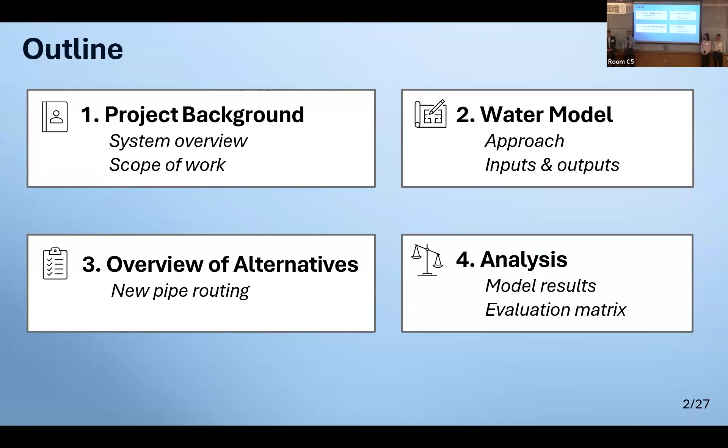To give you a brief outline of what we'll be talking about today: we'll start with our project background, go through our scope of work, talk about our water model, give you details on our input and output for that, give an overview of the alternatives we considered, and then go through our evaluation process and talk about the alternative we are recommending.

The well site consists of 2 wells and a well house, which chlorinates the water and sends it off to 2 water storage tanks. The Estates tank is a small 18,000 gallon tank that sits at the elevation of the neighborhood it serves, requiring booster pumps to maintain adequate water pressure, and Tank 1 is a 100,000 gallon tank that serves the Mountain Estates neighborhood.

Due to increase in water demand, the district plans on building a new 250,000 gallon tank called Tank 2. Along with that, they'll be decommissioning the Estates tank. It was our goal to determine the most optimal connection between Tank 2 and the Estates neighborhood.

In order to determine the most optimal distribution method, we have to model our system. Water modeling software such as WaterGEMS, InfoWater, and EPAnet-based tools all run on the EPANET hydraulic engine, have similar capabilities, and are expensive.

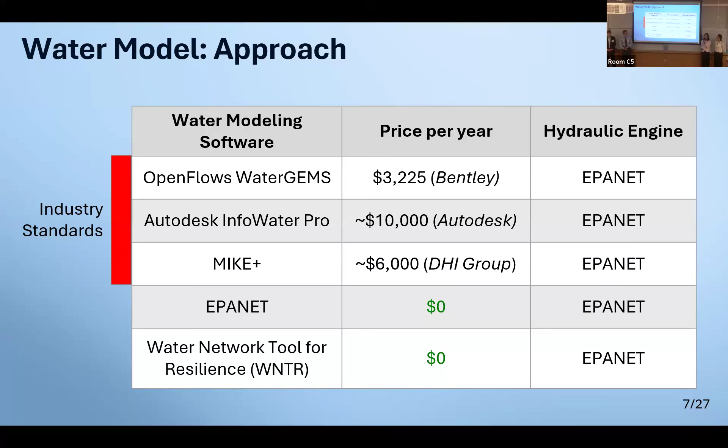So what is WNTR, the Water Network Tool for Resilience? It's a Python package created by the US EPA that allows custom scripts to access EPANET's hydraulic engine, or its ability to do hydraulic calculations.

What that meant for our project is that it allowed our custom Python script, developed with the help of our faculty advisor, to take a number of inputs and turn it into a water model. It created results in the form of Excel files, charts, and a time series animated map that Anya showed in the last slide. We'll go more into detail on all of these inputs and outputs in the coming slides.

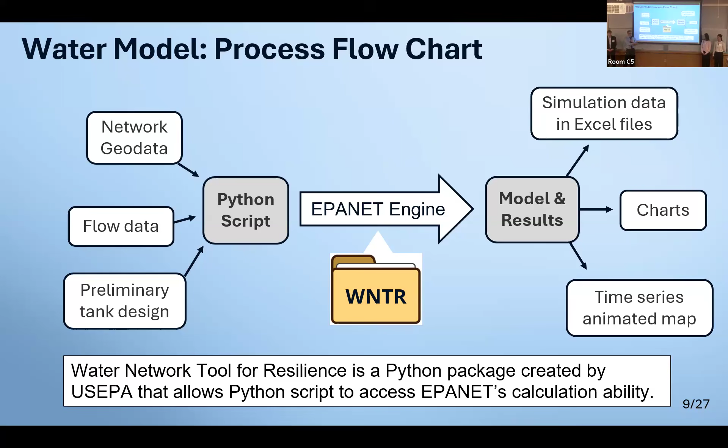The simulated water network required certain flow values, such as peak flow, peak average daily flow, and minimum daily flow. To define these values, we requested 10 years worth of flow meter data from the district. We then created a Python code to analyze the data and produce the values we needed. To ensure they were correct, we hand calculated a small sample size and ran the code to compare.

To go into some more detail on the input data we prepared for our model, we started with the GIS data provided to us by the Water District, and we converted it into a form usable by our script.

Next, a pump curve was approximated based on the total dynamic head required to lift water from its depth in the aquifer all the way to the top of that new tank, at reasonable flow values. And then all of that data was packaged into individual Excel files for each of the individual trials that we ran.

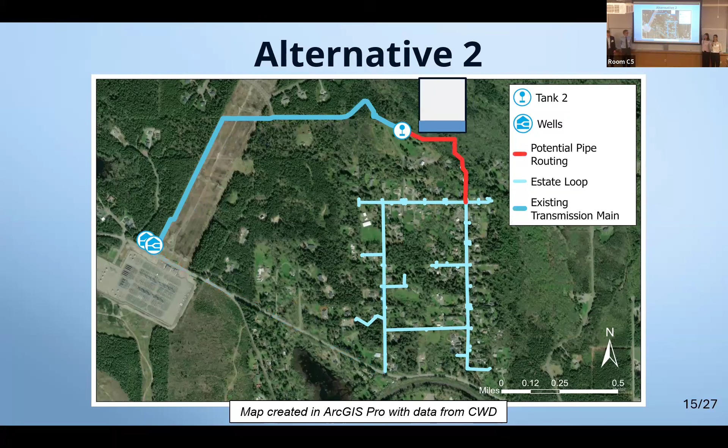Alternative 2 abandons that southern pipe, so all the water from the well house will be supplied to Tank 2. Then, to serve the community, we are proposing a newly constructed pipeline here, highlighted in red.

And that'll be connected at the northeast end of the community.

Alternative 3 is a combination of the previous two alternatives. In the same way as alternative 1, it'll split flow at the well house, one to fill Tank 2 and one to the SUGARLOAF Estates community. Then once at capacity, it can utilize bidirectional flow within the existing water main, as well as that newly constructed pipeline, which proposes two connections within the water network, creating a loop system for the district.

For alternatives 2 and 3, we are looking into a newly constructed pipeline. We aligned our pipeline in accordance to the existing easement that the water district provided to us, which goes through 4 different parcels of land and totals about 1,400 feet of pipe. With this, we analyzed 4 different pipe diameters: 6-inch, 8-inch, 12-inch, and 16-inch.

Here's our fully graded decision matrix. We have 6 criteria: hydraulic performance, cost, maintenance, constructability, permitting, and future considerations. We met with our sponsors and discussed their preferences, and we came up with the grades that you see here.

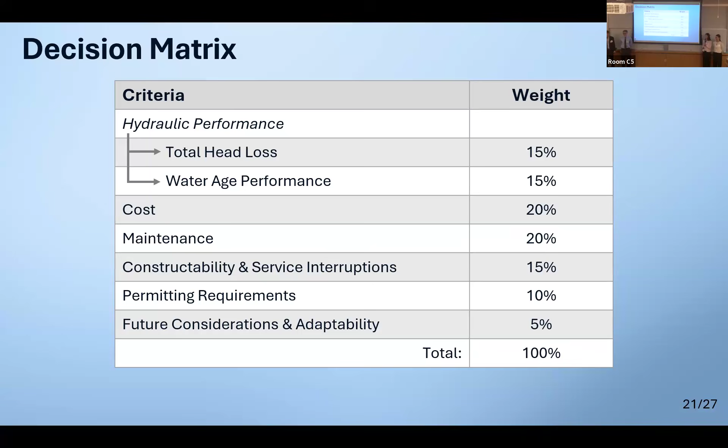For hydraulic performance, we assessed 3 factors: pressure within 30 to 80 psi, velocity less than 8 feet per second, and water age with a typical value of no more than 3 days. This is to avoid chlorine decay and stagnation. Water age is how long water has been sitting in the pipe since it left its source.

Based on the results of our trials for all of our alternatives across these 3 testing conditions, our first finding was that for high pressure scenarios, all of our alternatives performed similarly, so those were left out of our final analysis. Our next finding was that maximum water velocity was well below the mandated 8 feet per second for all of our alternatives, so that was also left out of our final analysis.

Next, we concluded that for low pressure scenarios, total system head loss was an effective representative measurement, because head loss is the energy that water loses as it travels through pipes and around bends within the system. Water stores energy in the form of pressure, so the higher the head loss the system has, the lower pressure we'll see within the system and at connections when you turn your faucet on in your home.

So in the end, we ended up with 2 criteria for our final analysis of hydraulic performance: total system head loss, and a metric related to water age tied to flexibility and operation, so the system's operators can ensure adequate turnover in the tank and maintain a reasonable average water age.

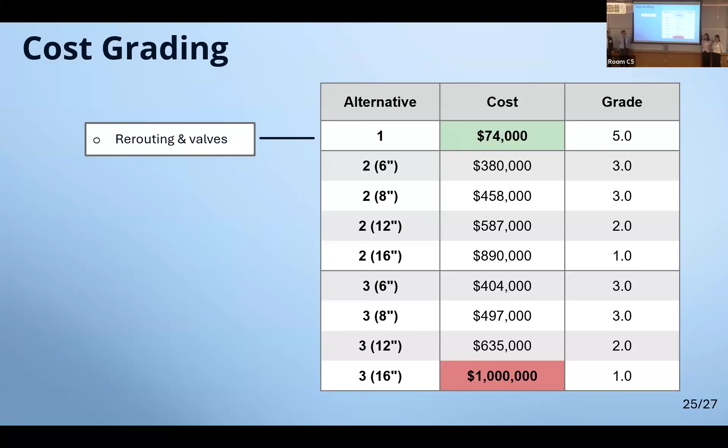Alternative 2 gets a lot more expensive because it involves laying down a new pipeline, which requires vegetation clearing, connecting to the existing water main, abandoning pipe, and more. Alternative 3 gets slightly more expensive because it's a combination of the previous 2 alternatives, involving rerouting, installing valves for bidirectional flow, as well as constructing the newly proposed pipeline. We found that our least cost-effective solution is alternative 3 with a pipe diameter of 16 inches, approximated at about $1 million, so it got rated the low score of a 1.

For alternative 1, we scored it a 1 because it is a branch system. Alternative 2 is also a branch system, however, it has new piping, so it's graded a 3. Alternative 3 is going to be a loop system, meaning part of it can be taken offline for maintenance while the rest remains operational. Therefore, we grade it a 5.

For constructability, alternative 1 was graded a 5 because there's very low construction. Alternatives 2 and 3 were graded lower based on their pipe diameter. For permitting, since alternative 1 has limited construction, it requires limited permitting, so it was graded a 5. Alternatives 2 and 3 both required a new pipeline to be installed, which requires numerous permits such as clearing, grading, and right-of-way, therefore it is scored a 1.

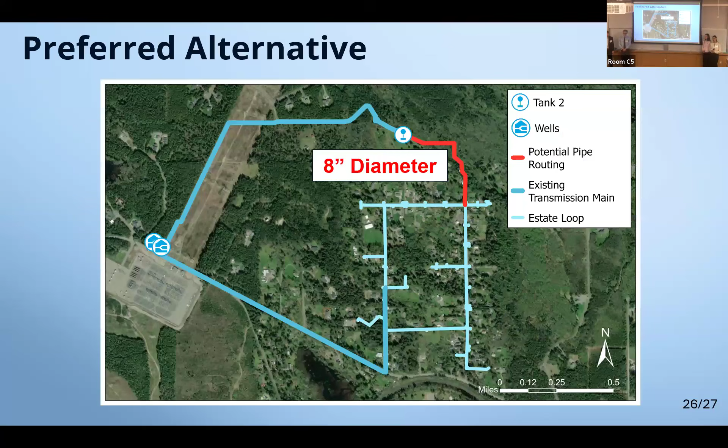Brilliant job on the analysis presentation. One of your slides had the different parameters that you used for scoring. I was wondering if each of those parameters were equally weighted, or should one parameter be weighted more than the other? To make sure I'm understanding your question correctly, it's about how we weighted each criteria and why we didn't make them all equal to each other.

So really the main aspect of it is with this modeling, we want to make sure that the customers always have adequate pressure and that it works well. Also, the cost of things is a big driver in the decision-making process. Constructability, permitting, and future considerations are big parts of the evaluation. However, after discussing with our sponsor, making sure they have the best hydraulic performance is definitely a priority.

Congratulations again on your modeling and your presentation, very clear, great presentation. I'm curious about your fire flows. Did you consider fire flow at all, and how would the fire flow demand affect your pipe diameters and your analysis?

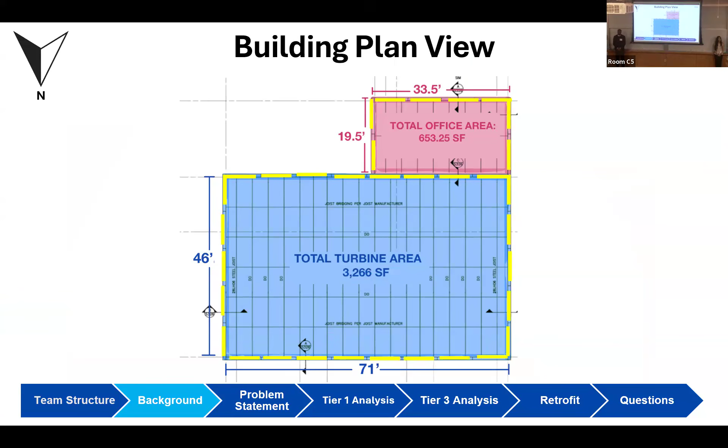As you can see, in blue is our main building, which has 1 story. In red is our office building, which has 2 stories. The entire building is made of precast concrete panels, shown in yellow. These are our shear walls, the main structural component resistant to lateral forces such as seismic forces. In the event of an earthquake, these walls take the north-south component, and these take the east-west component.

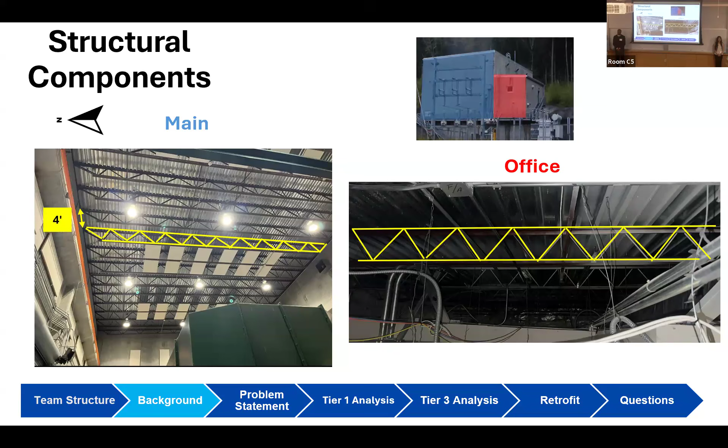Onto more structural components: in the picture on the left, we have a truss in yellow. This is an AOH 28 steel joist, running north to south, spaced 4 feet apart. The picture on the right is a close-up of the truss. On top you can see the steel deck, which is 1.5 inch corrugated steel deck. You can also see the concrete walls from the inside.

Now Daniel's going to talk about the problem statement. The powerhouse is a key facility of Seattle's water drinking system. Although it doesn't generate power for the city of Seattle itself, its primary importance is supporting continuous water delivery and treatment, which makes maintaining its functionality critical.

However, the powerhouse was built before current seismic code provisions, meaning its ability to resist earthquakes is uncertain. Because the powerhouse is located in a region influenced by earthquakes, a major seismic event could cause significant structural damage and disrupt operations. Since it's a key facility, Seattle City Light needs to ensure it remains safe and operational even after an earthquake. For that reason, our team has performed an assessment following ASCE 41-23 and the Seattle existing building code for retrofit.

Now Eric is going to talk about the risk category of the building. Before we can start our assessment, we first need to determine the performance objective of the building during an earthquake. To do this, we first need to determine the risk category of the building.

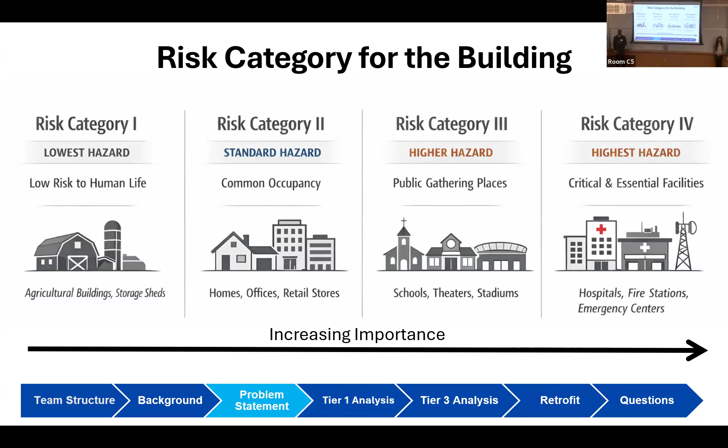Risk category, as defined by ASCE 7-22, goes on a scale of 1 to 4, where 1 is low risk to human life and 4 is an essential building like a hospital. As mentioned earlier by Daniel, because this is a key facility, we can classify this as a risk category 4 building. From this, we can use ASCE 41-23 to determine the performance objectives based on two hazard levels using new building design standards.

We'll be using new building design standards instead of existing building design standards, as requested by Seattle City Light. So for a BSE-1N, or a rare seismic event, it will require immediate occupancy performance.

Immediate occupancy performance means that during an earthquake, the building sustains minimal damage, and after an earthquake, people can immediately occupy the building, making it operational again.

Meanwhile, for a BSE-2N or a very rare seismic event, it will require a life safety performance. Life safety performance means that during an earthquake, the building sustains some damage, but doesn't fully collapse, and after an earthquake, people can safely leave the building.

So how we're going to use this is we first determine the period of the building using ASCE 7-22, which came out to be around 0.1 seconds. From this, we can read the spectral acceleration, which came out to be around 1.1 g. And from this spectral acceleration, we can then multiply it by the weight of the building to give us the shear demand needed for our assessment.

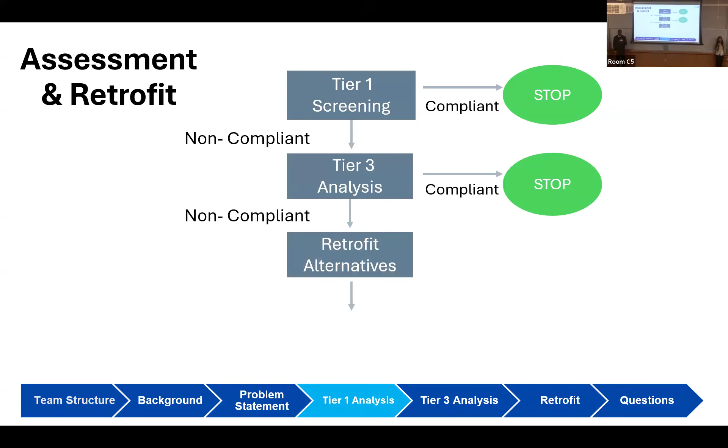If an item is found to be compliant, then we will stop and no further analysis will be done on that item. But if it is found to be non-compliant, we will take those items down to a Tier 3 analysis where we'll look further into those non-compliant items. The same process will then happen here. If it is found to be compliant, then we will stop and no further analysis will be done. But if it is found to be non-compliant, those will be the items taken down to retrofit alternatives, where finally the team will be able to recommend the best suited alternative for Seattle City site.

Shown is an example of what these Tier 1 checklists look like. Highlighted in yellow, you'll see that it gives us the checklist type. This one shows the immediate occupancy, but like I mentioned earlier, we also checked the life safety. Also highlighted in yellow, you'll see that it gives us the building type. Our building is made out of precast concrete, so that's why we are using the PC2.

Shown are the 3 evaluation statements that our team found to be non-compliant from our Tier 1 screening. These items had to do with the transfer to shear walls, which describes how our diaphragms, like our roofs and floors, are able to transfer those seismic forces onto our shear walls. Another item had to do with any openings immediately adjacent to our shear walls. And a third item had to do with our wall thickness.

Because these were the only 3 items that we found to be non-compliant from our Tier 1 screening, these are the 3 items that will get taken down to a Tier 3 analysis, which Daniel will further explain.

So continuing with Tier 3 analysis, we have the opening adjacent to shear walls. Here we are looking at the 3D representation of the office portion of the building. The lower level goes from 0 to 11 feet, and the upper level goes from 11 feet to 23 feet. In the middle, we have an intermediate office floor slab, which is our diaphragm, shown in blue.

In seismic design, the diaphragm is a horizontal structural element, such as a roof or floor slab, that collects earthquake forces and transfers them into vertical lateral force resisting systems such as shear walls. In this case, the diaphragm has an opening, meaning it cannot transfer seismic forces uniformly into the shear walls.

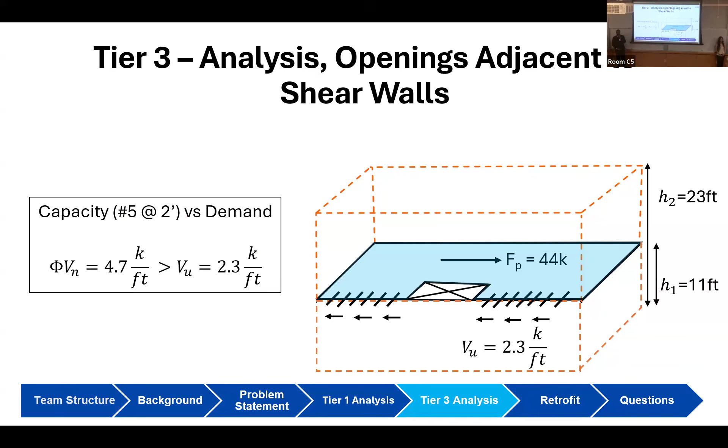Given these forces, we calculated our maximum demand, but this does not account for the slenderness of the wall. Using an equation that accounts for slenderness, we obtained a moment demand of 12 kip-ft on a per foot basis. To analyze capacity, we took a 12-inch cross section of our wall panel and determined a capacity of 13.6 kip-ft, making capacity greater than demand and this item compliant in our tier 3 analysis. Now Lisa will explain the last item.

Finally, to assess the transfer of seismic forces from the diaphragm to the wall, we compare demand versus capacity. For demand, we look at the roof plan, where we have two types: type 1 on the edges, and type 2 in the middle. We load this with our seismic forces and observe the shear that occurs in each type. From this we came up with a shear diagram, from which we calculated a shear demand for type 1 of 1.76 kips per foot, and for type 2 of 0.83 kips per foot.

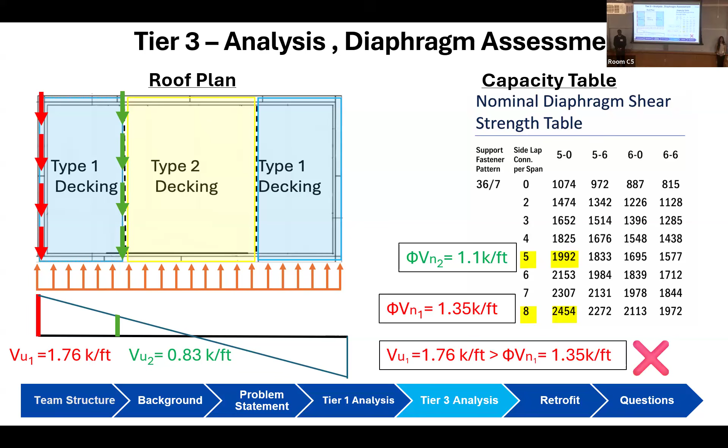This is the only item that was non-compliant from the tier 3 analysis, and therefore is the only item that we're going to retrofit.

As Lisa mentioned, there's only one item that is not compliant from our tier 3 analysis: the transfer of load from the diaphragm into the concrete wall. So we only need to do one retrofit for that connection.

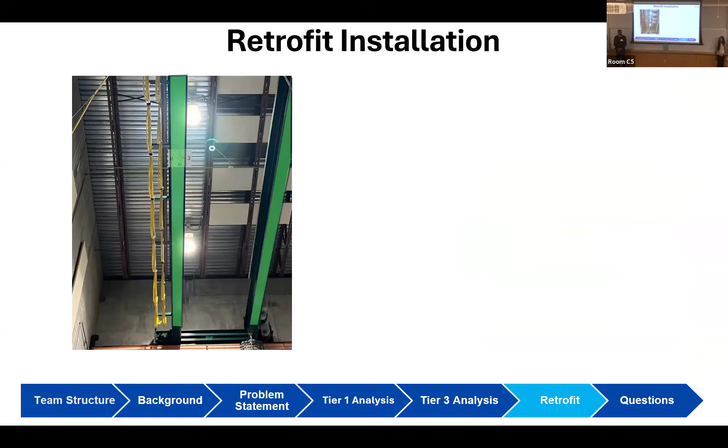Aside from our retrofit, we'll also be designing a platform. This platform will be used by steel workers standing on it to install the retrofit. We'll utilize the crane by using the crane leg to place beams, and on top of those beams we'll have our deck.

So just to give a quick summary of what we did, we first started off with a tier 1 screening. From that tier 1 screening, we found 3 deficient items: the transfer to shear walls, the openings at shear walls, and the wall thickness.

Because of these 3 items, we then took that to a tier 3 analysis. In that tier 3 analysis, we found that openings at shear walls and the wall thickness were compliant, meanwhile the transfer for shear walls was non-compliant.

Because of this, we then took that item into the retrofit phase, and from that retrofit we created a design which consisted of installing the L angle to the metal deck and the concrete wall. In addition, we also designed a platform where the steelworkers can install the retrofit.

In addition to all of that, we also created a cost estimate, which came out to be around $38,000, which included all the materials, labor, and anything else. Thank you for listening. Is there any questions?

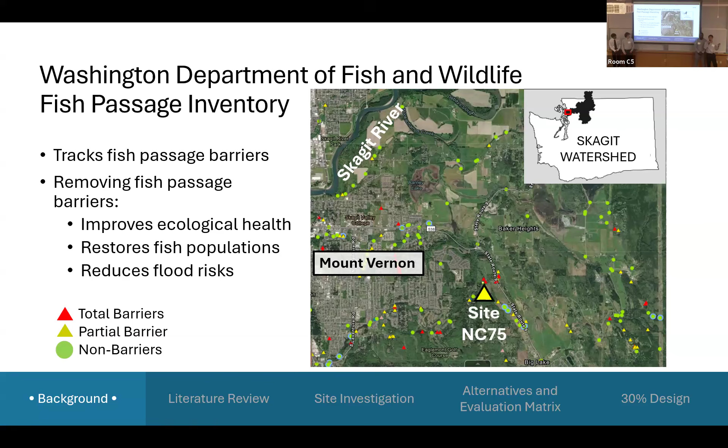So to start things off, we want to first talk about the Washington Department of Fish and Wildlife, or WDFW, Fish Passage Inventory. The WDFW tracks fish passage barriers across the state and identifies them as either total, partial, or non-barriers. This inventory aims to remove these barriers in order to improve ecological health, restore fish populations, and reduce flood risk across the region. Our site is located within the Skagit watershed and has been identified as site NC75, a partial barrier due to an existing culvert.

Looking more into our site, it was previously privately owned by a local couple, but it has recently been donated to Skagit County. Skagit County plans to incorporate this site into the reopening of Hiawatha Big Rock Park, which is a hiking trail that's been closed to the public since 2010.

As mentioned before, our site has a current culvert with a diameter of 4.5 feet and a span of 35 feet in length. This culvert has a slope of 2.2% and a smooth metal interior, which leads to fast and shallow water flow.

As a result, a 2001 survey showed that this site only has a 33% fish passability. One last thing to note is that the culvert is currently showing some structural damage, which means water may actually be flowing outside of it.

This is important because our site has a drainage area of 1.25 square miles, and removing this existing culvert would restore 1.36 linear miles of upstream habitat for native fish, such as cutthroat trout, chinook, chum, steelhead, coho, and pink salmon.

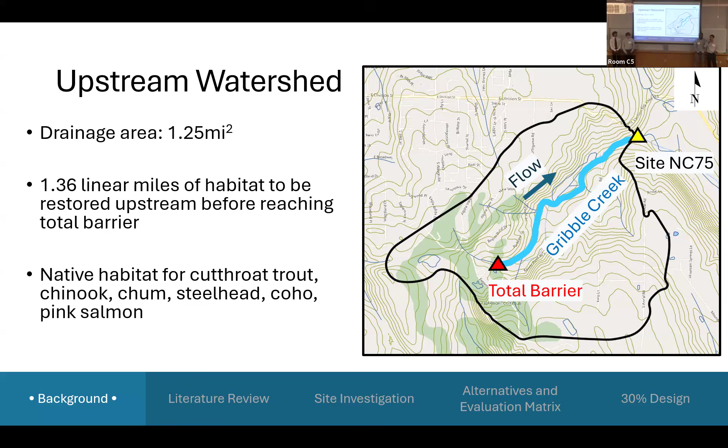Shown here is a map of the surrounding area. As you can see, water flows downstream from the total barrier to our site, which eventually continues to flow under State Route 9 before joining with Nookachamps Creek. From there, Nookachamps Creek flows north and eventually merges with Skagit River.

Our objective is to remove this existing culvert in order to improve fish passability, then restore the stream to its natural conditions. However, Skagit County would also like to preserve the crossing the culvert is currently providing, and has therefore asked us to evaluate some other crossing alternatives.

As part of our literature review, we looked at several different manuals. This includes the WDFW Water Crossing Design Guidelines, which helps with stream restoration, hydraulic design, and determining a crossing structure. We also looked at the USGS magnitude, frequency, and trends of floods at gauged and ungauged sites in Washington based on data through water year 2014, which helped us estimate the volume of floods passing through our site.

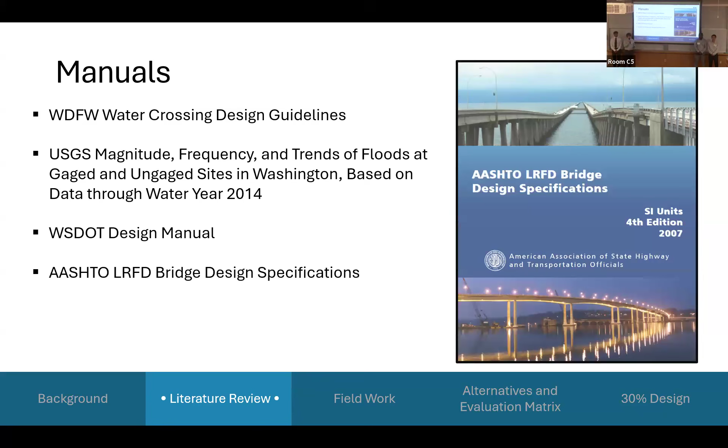We looked at the WSDOT Design Manual to help determine bridge geometry, and then two AASHTO documents, the LRFD Bridge Design Specifications and the Guide Specifications for the Design of Pedestrian Bridges, which each helped us with different structural requirements for our crossing structure. Within the WDFW manual, we looked at 4 preliminary options for culvert replacement.

The first one was a complete removal of the structure, which is the preferred method for stream restoration, but would remove crossing for pedestrians and wildlife, which makes it unsuitable for our site.

We then looked at 2 different culverts: a no-slope culvert, which is flat, and a stream simulation culvert, which is sloped but mimics the natural channel bed inside of the culvert. However, both of these culverts block off the floodplain, the area where water flows under extreme weather events, and they do not tolerate any lateral movement of the channel.

Based off of preliminary site research, we determined that both of these characteristics would be very important for our site, and thus we decided to proceed with our last option, a bridge.

Bridges can be used on any size channel, and they're extremely flexible in design. Additionally, they do not obstruct the floodplain sitting above it, instead bringing greater riparian benefits to our site. Bridges are generally more expensive than the other options, but we determined that preserving the floodplain and allowing for lateral channel movement would be of great benefit for our site.

Within the WDFW manual, we then looked at several requirements for bridges. This includes that we need at least 3 feet of clearance between the 100-year flood surface, the most extreme flood event we'll be analyzing for our design, and the bottom of the bridge.

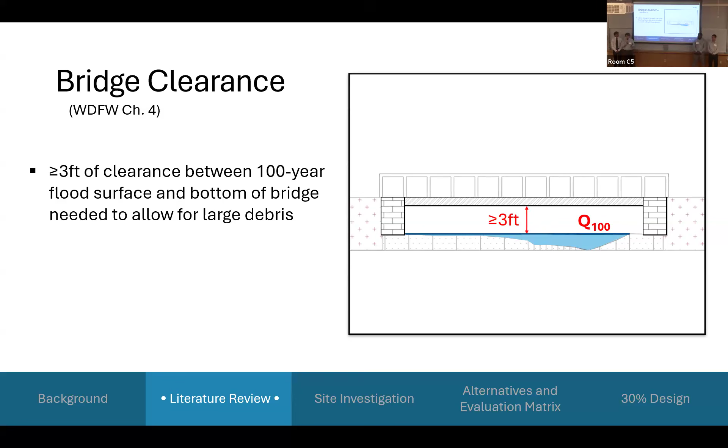This is necessary so that any large debris passing through the site does not get snagged on the bridge and cause damage. Additionally, our bridge should ideally span across the entire floodplain. However, this is not always economically feasible in case the floodplain is extremely large.

Under this circumstance, we may encroach into the floodplain, but we'll have to do several other checks to ensure that the bridge is still suitable for our site.

In order to make sure that we stayed in compliance with our bridge span and our bridge clearance, it was important for us to determine what our annual exceedance probability was for our 2-year and our 100-year flood. To do this, we looked at the USGS manual, which gave us the equation based on our flood region being flood region 3.

Shown here in the equation, you can see the lowercase variables, which represent coefficients based on the flood region. You can also see the capital A, which is based on our area that we took from the watershed delineation. And the capital P is the annual mean precipitation, which we took from StreamStats.

With all of those, we were able to calculate what our 2-year flood was, which was 28 cubic feet per second, and our 100-year flood was 93.2 cubic feet per second.

Next, we wanted to get an idea of our bridge geometry, so we took a look at the WSDOT design manual. There, we found that the minimum width was 8 feet, and we also looked at the railing height of 54 inches, which is used to protect bicycle groups. One thing to note is that this is not a WSDOT project, so we only use this as a recommendation.

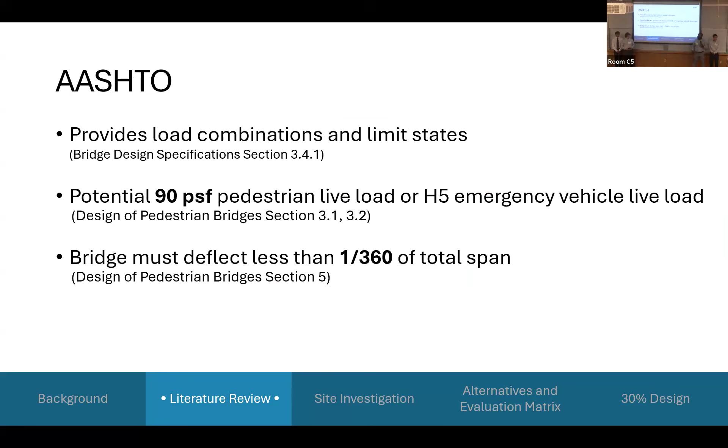With this channel geometry, we wanted to determine the shape of our 100-year flood to help determine the clearance of our bridge and the necessary span. To do this, we looked at several empirical equations, including the bankful discharge equation, which measures the volume of water passing through the bankful stage of our channel.

Within this equation, we found that the width of our bankful stage was 12.6 feet and the height was 1.4 feet. We then determined our slope using the longitudinal profile we made on site, and determined the median pebble size by recording the diameters of various rocks within our channel and graphing the result. Using all of these values, we determined that for this cross-section, our bankful discharge was 28.4 cubic feet per second.

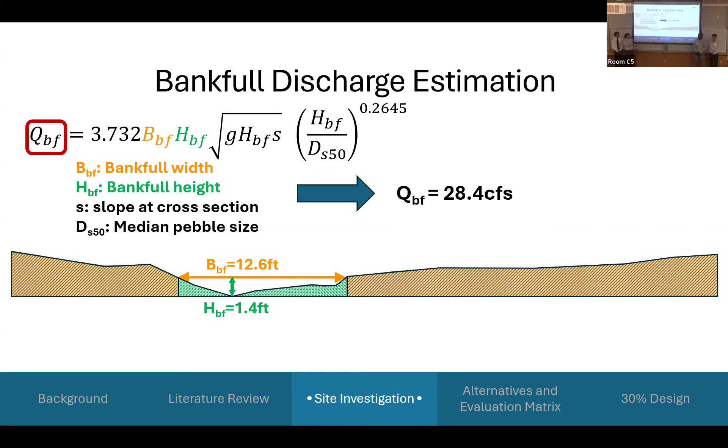Using all of these values, we were able to determine N, the roughness coefficient. In our case, we found that the bankful roughness was 0.021. The roughness within the floodplain is much different, as water rarely flows there, so we used tabulated values for heavy brush areas of 0.075.

Using these roughness values, we then applied that back to Manning's equation, but this time with our 100-year flood of 93.2 cubic feet per second. Within Manning's equation, we still know our roughness and our slope, and our area and hydraulic radius can be expressed as a function of the water height.

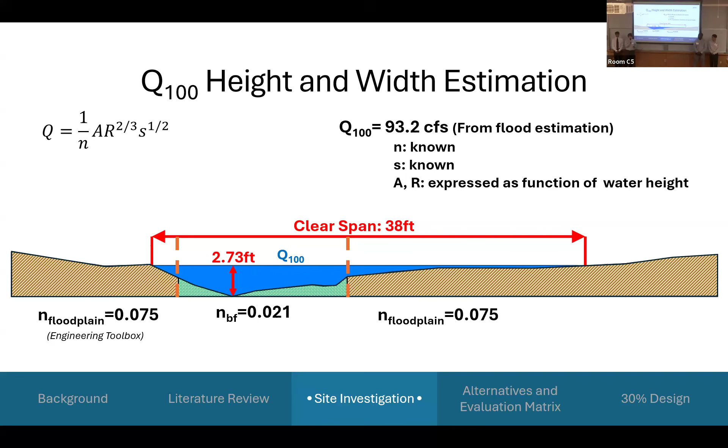This is to ensure that we have a smooth transition from this nearby cross-section to the bridge's location, and to ensure that we are not encroaching into the floodplain.

Once we were able to determine our bridge span and channel geometry, it was important that we looked at some alternatives. Our first alternative was a steel girder bridge. With this, we found that it had easy construction as well as quick construction and a long life cycle. However, it may require a crane being brought on site, and it also has vulnerability to corrosion due to being steel.

Our next alternative was a steel truss bridge. With this, it had easier material components to handle when being brought onto the site, as well as a great strength to weight ratio. However, with the steel truss, the problem is difficult construction and labor-intensive upkeep of maintenance over time.

Next, our last alternative was a timber girder bridge. With this one specifically, it also had a great strength to weight ratio, and it also had predictable fire safety. However, with it being timber, it was susceptible to biological attacks from insects as well as decay from water.

With those alternatives decided, it was important for us to get an evaluation matrix to determine our preferred alternative. We got some criteria and weighted them and got approval from our sponsors. One of our first major criteria was environmental impact, which looked at little to no site disturbance and little to no toxic chemicals. With this, the timber girder bridge won out over both alternatives.

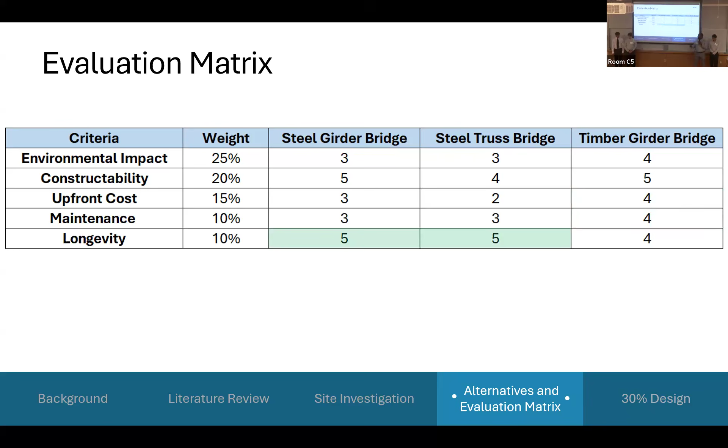We also looked at maintenance, longevity, hydraulic capacity, public safety, as well as aesthetics. With all of these ranks, we were able to determine that our preferred alternative was the timber girder bridge. With this, it won out with a score of 88 out of 100 over the other alternatives.

Now moving into our 30% design, I'd like to dive more into detail about those site constraints that Matt talked about previously. Our main site constraints are these trees that sit adjacent to the culvert.

Specifically this tree, circled in red, which is currently being undercut by the stream, causing erosion of the material around the roots. Our sponsors anticipate that this tree will collapse or be cut down during the construction process, so they will not look to preserve it.

However, they would like to preserve the trees just behind it, to the left of this red line. In order to do so, we will be placing one of our abutments in line with these trees to prevent undercutting.

Here is a plan view of our site with our proposed bridge location in the orange hatch. Our north side abutment will be in line with the edge of the floodplain.

Here are those trees that I just talked about, with the tree that's currently being undercut highlighted in the red dot. We will be placing our south side abutment in line with those trees behind it to prevent undercutting and erosion.

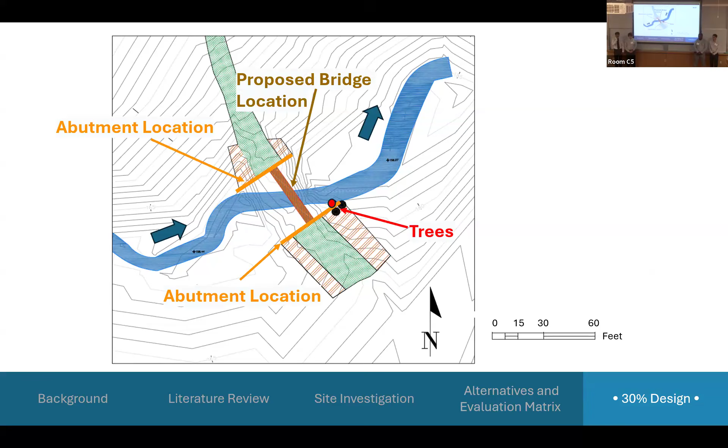Moving on to our bridge design, I'd like to highlight some of our bridge geometry. We consulted with our sponsors over the size of the vehicles they would need to pass over the bridge and arrived at a width of 5 feet.

We will be using a railing height of 4.5 feet to ensure cyclists don't fall over. Using the NDS wood design manual as well as the AASHTO load cases, we sized our wooden girders to be 12.25 inches wide and 18 inches deep, using glue laminated yellow cedar. We will also be using 3x12 wooden beams that span across the bridge as our decking.

And our bridge will be 40 feet in span. Here is the current condition of our site.

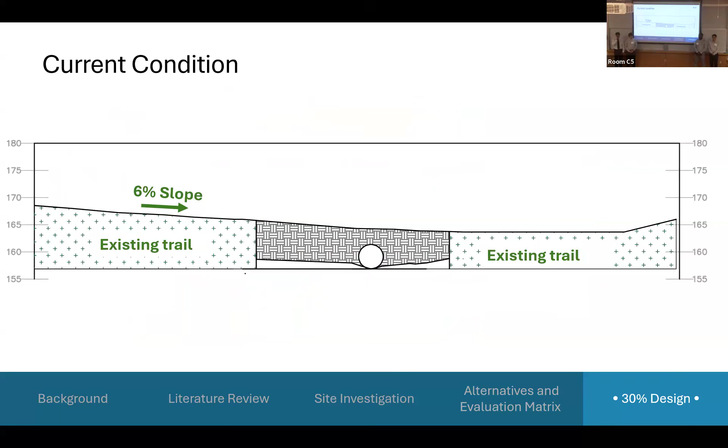Our trail currently has a 6% slope that goes down to the location of the culvert. We will need to excavate this region about 300 cubic yards of fill to remove the culvert and restore the stream to its natural condition. We intend for our bridge to be at a level grade, so we'll need to fill this region to ensure that the bridge and the trail are at the same grade.

Going further into our bridge design, like I said before, our bridge is 40 feet in span, a little bit longer than our Q100, to account for climate change as well as ensure that our south side abutment is in line with those trees. Here is our Q2, or the height of our average discharge, and then our Q100, which sits 5.9 feet below the bridge superstructure, well within the WDFW clearance requirement of 3 feet.

We do not have a geotech report on the site, so we will be working under the worst-case assumption that the scour line sits 3 feet below the ground surface, and our foundation must sit 2 feet below this line, for a total of 5 feet below the ground surface.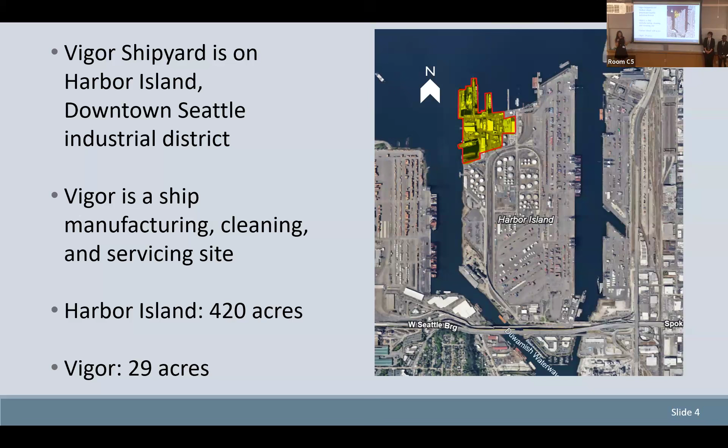It occupies 29 acres in the northwest corner, shown here. And Harbor Island is 420 acres.

So our problem statement: Washington State's piers currently drain untreated stormwater into surface water, such as the Puget Sound. Therefore, we have been tasked with designing a system to collect and treat stormwater from Vigor Shipyard's piers to prevent common stormwater constituents from entering Elliott Bay.

All right, so here's an aerial view of the site. Essentially what you're looking at right now is an area highlighted in blue, which represents the area in which stormwater is currently being treated. There is a drainage system that conveys all the water to the detention tanks right here, and there is a treatment system on site.

The areas highlighted in yellow, which represent piers, are the areas that are untreated. Why are they untreated? Because the piers were built before stormwater collection systems existed, so instead they drain directly into the Puget Sound.

We want to mention that we have 4 piers operating at Vigor currently, but for the scope of our project, we're only focusing on Pier 3 and Pier 4.

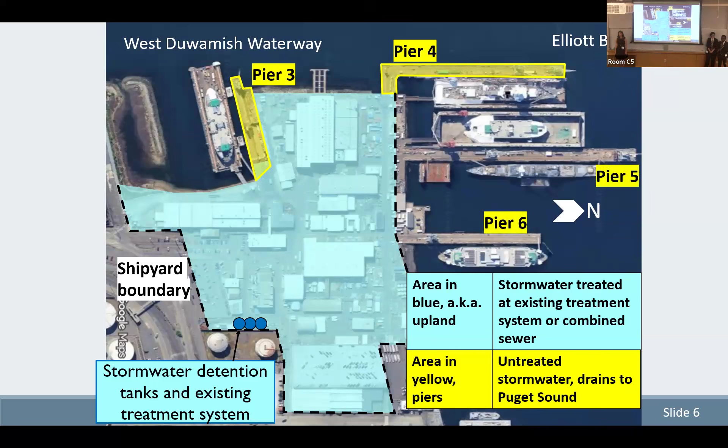So here's Pier 3. Pier 3 has 2 sections, an old section and a rebuilt section. The old section has 666 deck drains, and the rebuilt section, which is graded, has 5 deck drains.

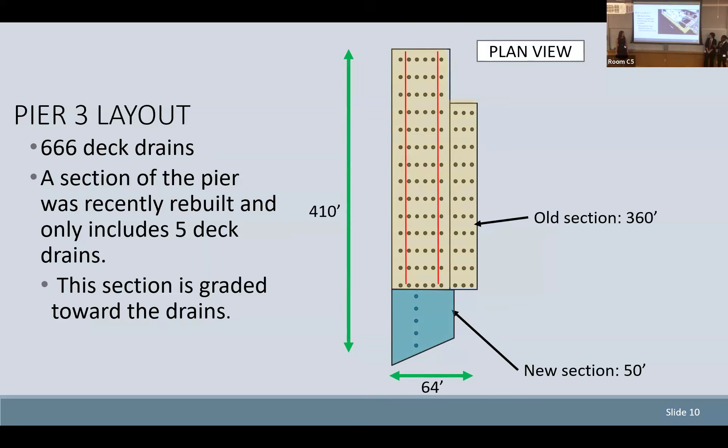So, jumping into our proposed alternatives, the goal of these proposed alternatives is to design a stormwater conveyance system for piers. I'm going to briefly describe option 1, option 2, and option 3. For all 3 options, the water will be collected through deck drains and then conveyed through pipings.

Briefly explaining option 1, the water is collected and sent to the nearest catch basin, and from the catch basin it can be conveyed directly to the existing treatment system.

Option 2: instead of conveying it to a catch basin, we are going to convey it to a wet well, and then the water will be pumped to an upgraded treatment system that has been chosen.

Option 3 is quite different from option 1 and 2. Instead, we're going to treat beneath the pier, where the treatment unit will be placed, and that's how the treatment operates.

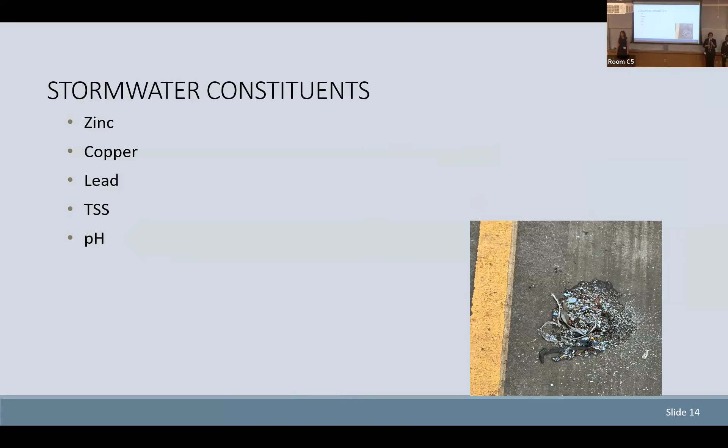To begin, we have main constituents being heavy metals. This includes zinc, copper, lead, as well as total suspended solids and the pH of the water. Vigor does a great job of managing the constituents on site with sweeping and best management practices, but this is largely impactful to the aquatic environment nearby, and the introduction of these contaminants can be very harmful to our precious coho salmon as well as the vegetation and water quality.

We will determine the amount of water that comes off of a pier that needs to be treated with the Western Washington hydrologic model, and then partnered with the amount of water that a treatment system can handle, we will determine how big or how many units we need.

Our first option is the chemically enhanced sand filtration system, which is the on-site treatment unit we've discussed. Our second option is a filter media bed, an equipped system about the size of a trailer, placed on shore. Our third option is an Aqua flow filter, a cartridge-based unit about the size of a catch basin. So in order to get the water there, we need closed deck drains.

We've modeled this with the Santa Barbara Urban Hydrograph and then compared this flow to the capacity of a deck drain, which was modeled with the Weir equation. Our main design constraints here are the ponding depth on the pier, how much water that was given to us by our sponsors. This includes a factor of safety of 2.

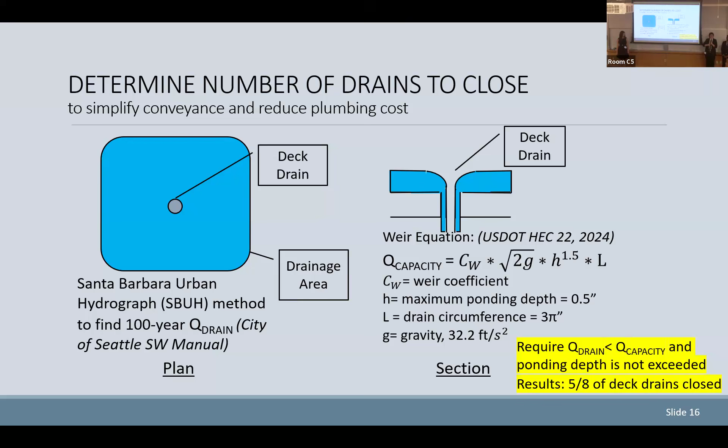By closing deck drains, we increase the area surrounding a deck drain, therefore increasing the flow that enters a deck drain. We've done this iteratively until we've concluded we close 5/8 of the deck drains and ensure that the capacity of the deck drain is not exceeded, as well as that the ponding depth on the surface of the pier is not exceeded. So there was that situation with the 5 deck drains on Pier 3.

So this section, the water will travel to the nearby catch basins. And for the old section of the pier is where we will be designing the pipe conveyance system. So we have a few main constraints: one is that pipes cannot descend below the high tide at 11.36 feet, or else they will be submerged by salt water. Another constraint is that pipes cannot descend below the invert elevation of the catch basin, otherwise water could backflow into these pipes.

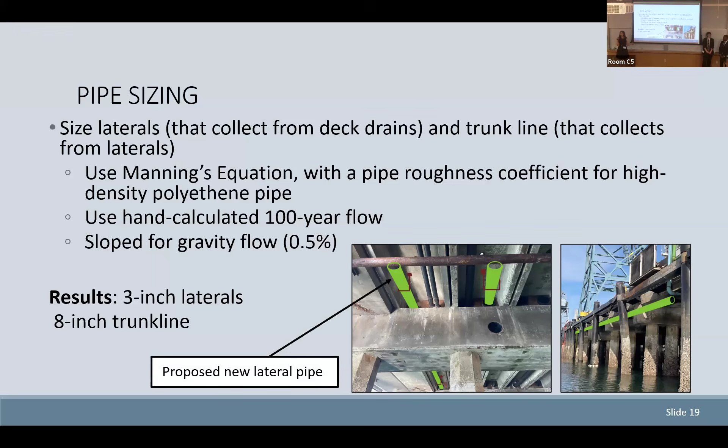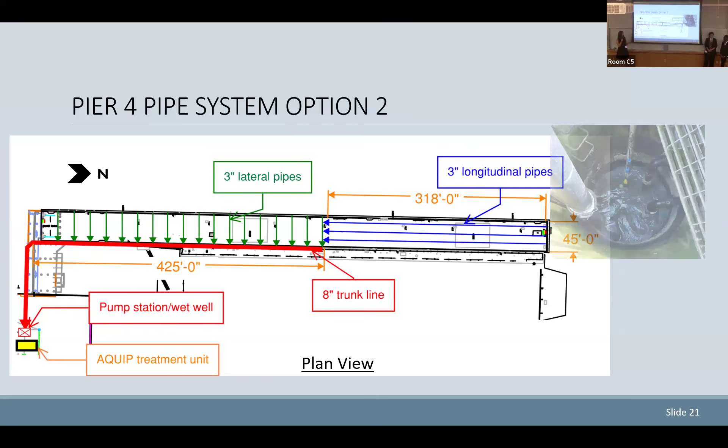The second option features a similar conveyance system to option 1, but instead of reaching a catch basin, the water reaches the shore and enters a wet well with a pump station, which pumps water to an at-grade treatment unit shown here in yellow, and gets filtered through a media bed and then discharged back into the Puget Sound.

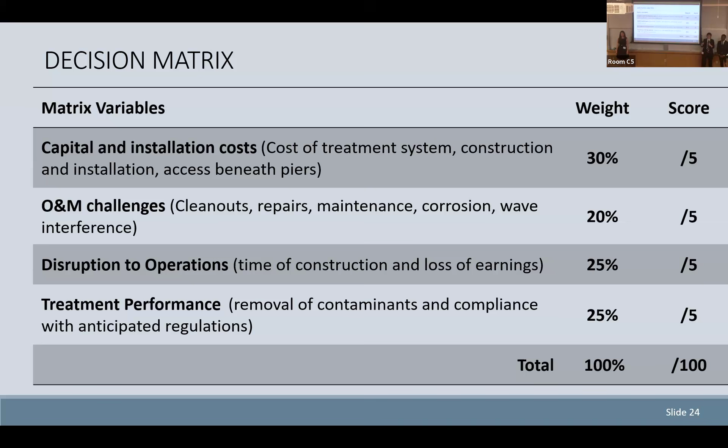In total, our least expensive option was option 1 for both Pier 3 and Pier 4, and option 2 was our most expensive. So we've compared all of our alternatives, including the costs with operation and maintenance challenges, as well as the disruption to operations, what would require Vigor to stop operating, and the treatment performance, compliance with anticipated regulations, and how clean the water will be at the end.

For our 30% deliverables, we are going to have CAD drawings and hydraulic analyses. For our CAD drawings, we have a plan view, which is like a view from above, showing the pipe layout network and the location of the catch basins.

For profile views, we're showing how the pipes are sloped and where the catch basin is located along with their elevations. And for section views, it's a cross-sectional view of the pipes.

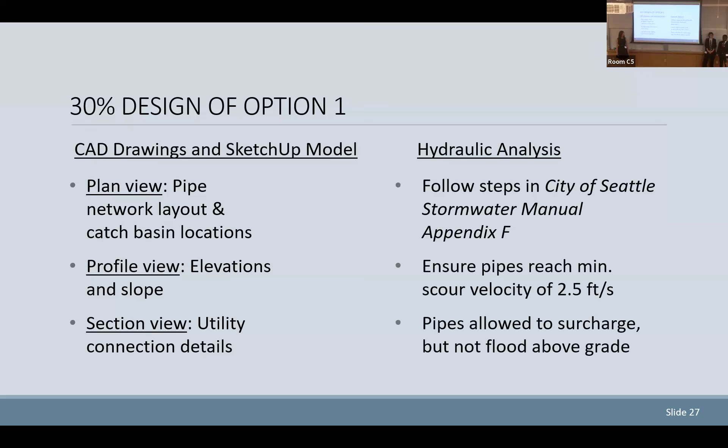For hydraulic verification, we're using Appendix F of the City of Seattle manual, just to ensure that scour velocity will be reached. We're also ensuring that the pipe will not flood above grade even when they can be surcharged.

Here we confirmed that there's no flooding above the grade, so our pipe sizing is successful and we can move forward with our 30% design.

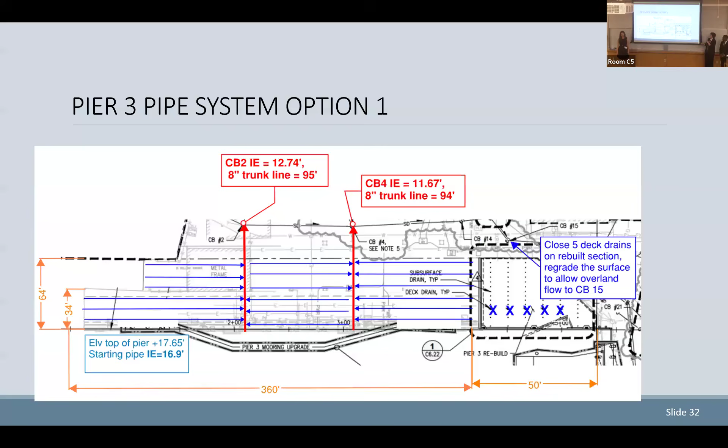Did you do any hydraulic analysis and verification for Pier 3? Thank you so much for the question. The question was, did we complete any hydraulic analysis for Pier 3? We definitely did. Here we have our options.

Let's see if I can get to my video. We did the same process as we did for... it does look like I've stopped sharing, unfortunately. Apologies for that. But we have a nice little video of modeling that pipe design network that we preferred. It's outlined on our poster, and we created that same design storm and made sure that the water doesn't flood above grade.

Here we go. Just down a bit.

There's Pier 3, and then we have a video right here.

I have a question. In option 2, which was above grade treatment, was it ever discussed with the sponsor of turning that into some sort of public display showing how the water gets treated? Thank you for the question. The question was, did we consider turning the at-grade treatment media unit into a public display for people to see how the water gets treated. We have not discussed this, primarily because Vigor is a private shipyard, so it is not open to the public.

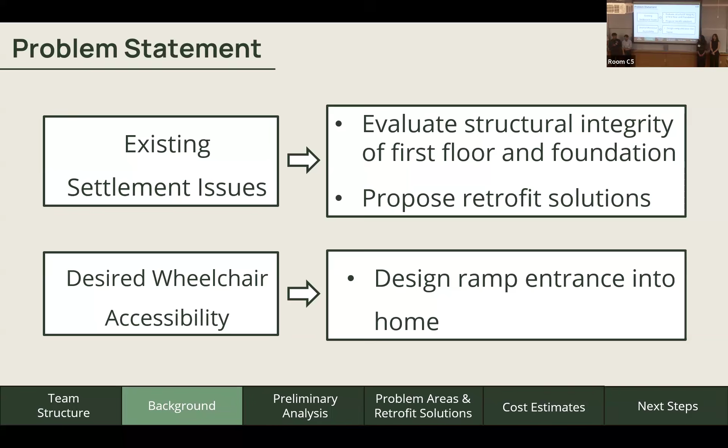We have four main problem areas that we're going to talk about with you today. The first being in the kitchen, which I'll hand off to Pablo to take.

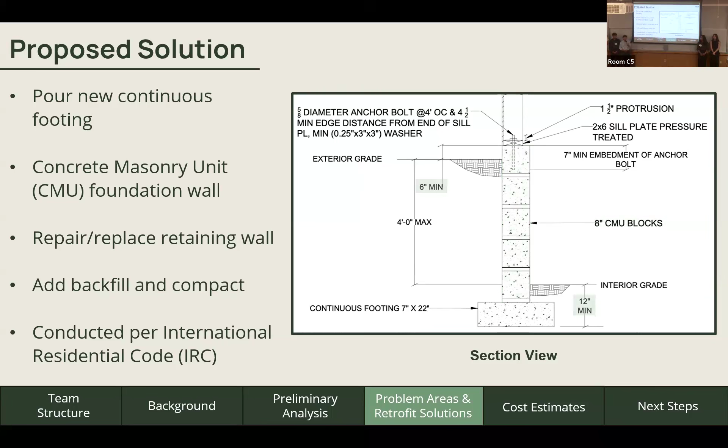The second problem area covers the kitchen and the living room. On our initial site visits to the house, we noticed significant sloping and serviceability issues throughout the first floor level, but most especially throughout the kitchen and living room.

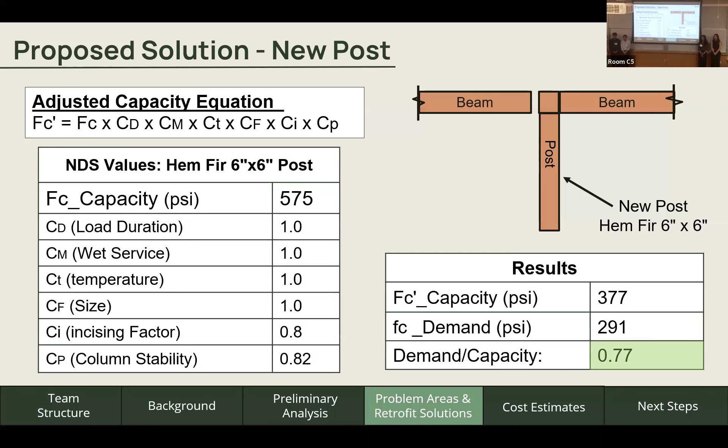Using this adjusted compression capacity equation, along with these adjustment factors, we were able to get a demand capacity ratio of 0.77. Anytime a demand capacity ratio is less than 1, that means a member is sufficient for the loading seen at this point.

Along with the post, we needed a footing to prevent further rotting at the bottom of the post and to also spread the loading down to the bottom of the soil.

So with the loading seen at this point and dividing that loading by the soil bearing capacity, we were able to get the dimensions of this footing to be about 1 foot and 7 inches square minimum.

Furthermore, we did calculations to reinforce this footing and found that 3 number 4 bars were sufficient.

Our last solution was to install a new beam to address the crushed beam. Using the NDS once again, we were able to design a 6x6 Douglas fir beam.

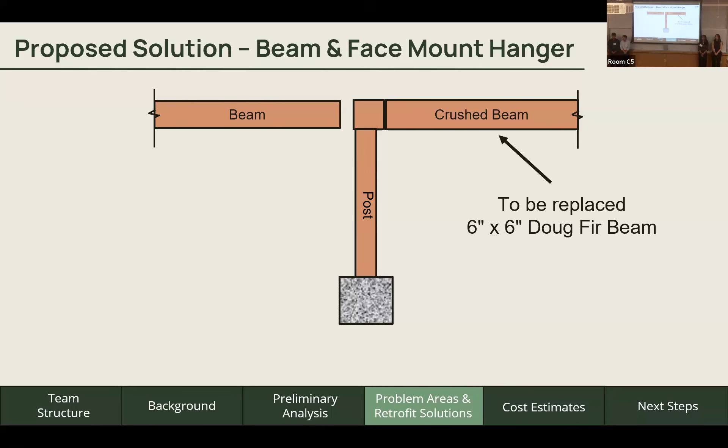Then, to address the discontinuity of the 2 beams, we are proposing to install a face mount hanger to make this one uniform beam.

So now I'll pass it on to Landon to talk about problem area 3.

Problem area number 3 covers the bathroom of the house. We believe there was a late addition to the home in the 1970s. And as soon as you enter the first floor bathroom, you see more sloping, this time towards the east wall.

This led us to investigate the framing and foundation right below. When we got to the crawl space, we saw significant moisture damage. The most important thing we saw was rotted sill plates that got completely crushed, as well as missing anchor bolts. These are important as they pose life safety issues in the case of a seismic event.

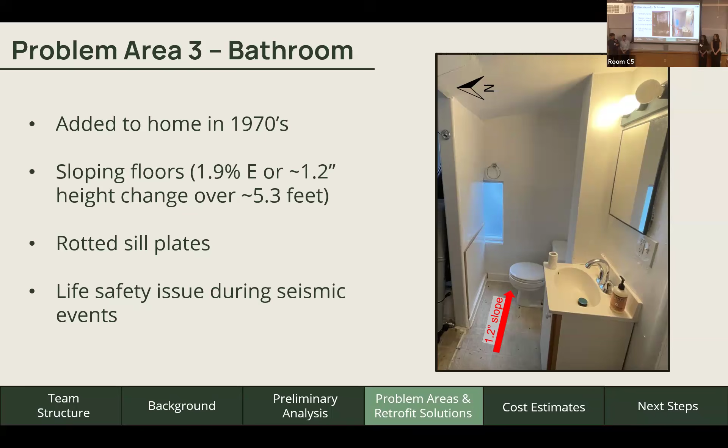For our proposed solution, we are proposing anchor bolts to get installed, as well as replacing that sill plate. The anchor bolts are important as they help secure the framing to the foundation, as well as help the house resist lateral loads. And the sill plates will be pressure treated to prevent moisture damage from occurring, like we saw previously.

Here's a more detailed section view with all the callouts addressing the issues I just mentioned. The first one being the pressure treated 2x6 sill plate, followed by our anchor bolts, spaced 4 feet on center.

And finally, we're going to be repairing the sheathing that got completely rotted out with new waterproof sheathing. And now Mika is going to talk to you about problem area number 4.

This posed a challenge for us. As we know, Michael and Dottie do desire wheelchair accessibility into their home, so something we needed to consider was whether or not the current framing members would be able to withstand additional loading from either a porch expansion or a ramp system being added on.

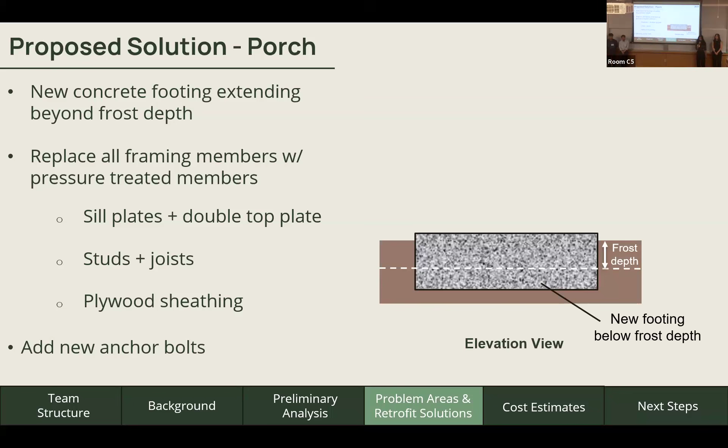We are proposing a full removal and rebuild due to the level of deterioration we're seeing within the porch. This would involve first having some type of localized shoring to hold up that area of the house while we remove the existing members of the porch, and then having a new footing implemented to extend below the frost depth.

After that, we'd suggest all new pressure-treated wood members be implemented. This would involve replacing the sill plates as well as replacing that beam with a double top plate, replacing all of these studs and joists, and incorporating new plywood sheathing along that west-facing side. And then finally, having anchor bolts to secure all of that new framing to the new foundation.

Regarding wheelchair accessibility, we are proposing that an aluminum ramp extend from the south end of the house rather than the north end, which is where the porch is. This would be so that wheelchair accessibility is not contingent on Michael and Dottie first replacing all of those porch members I just went over, as that is a more labor-intensive and cost-intensive retrofit.

So like I said, this would be an aluminum ramp, and it would also be pre-engineered to make it easy to install. It's also adjustable to combat minor settlement over time.

So that covers all of our problem areas and retrofit solutions, and I'll pass it on to Katie for the cost estimates.

For our cost estimates, we broke it up by retrofit solution and then assigned a priority level to each. Priority level 1 means it addresses a life safety issue or is pertinent to them moving into the house. Priority level 2 is our ramp and walkway, since this doesn't address life safety, but is necessary for them in the long run to have accessibility to the house.

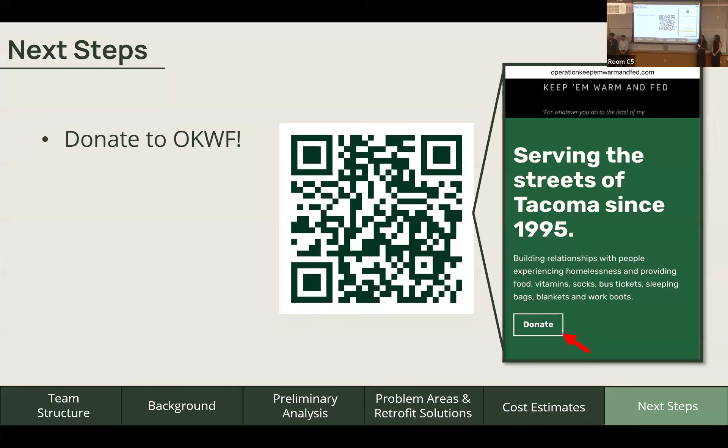Any other questions? Thank you.

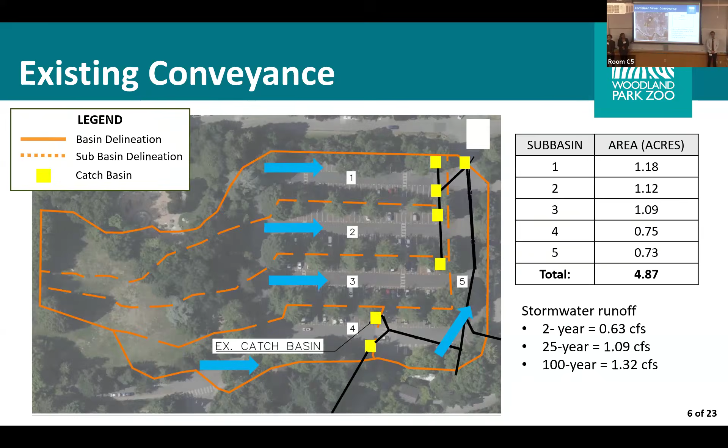As shown in the picture above, there's the bear lot, and stormwater runoff from the bear lot enters Seattle's combined sewer system. Under typical conditions, the water flows to the West Point treatment plant for treatment and eventual discharge into the Puget Sound. However, when the system flows exceed capacity, water is rerouted and discharged without treatment into surrounding natural bodies of water.

For the runoff from the bear lot, these reroutes happen at the points shown in blue and eventually discharge into the Ship Canal.

While the runoff values from the zoo bear lot are small due to the smaller area of our site, the zoo is still conscious of the effects that they're having on these CSO events, which have detrimental effects to the environment as well as public health.

For our design alternatives, we will have 3 different alternatives. Alternative 1 will be to create no action, followed by alternative 2, which requires a bioretention with vertical walls and a permeable pavement. Alternative 3 will require a bioretention, but this time with sloped sides and a permeable pavement.

This is a cross-section of a bioretention cell with vertical walls. The flow enters through a curb cut where there are then layers of composted material, bioretention soil, and aggregate subbase, which aid in helping infiltrate the water. Additionally, there is space left for ponding depth to allow the water more time to soak into the ground.

Because we estimated the infiltration rate of our site to be 0.1 inches per hour, in alignment with the hydrologic soil group we're assuming to have on site, the Seattle Stormwater Manual recommends implementing an underdrain to aid in conveying that water. In hand with an overflow, these two components prevent backup into the lot.

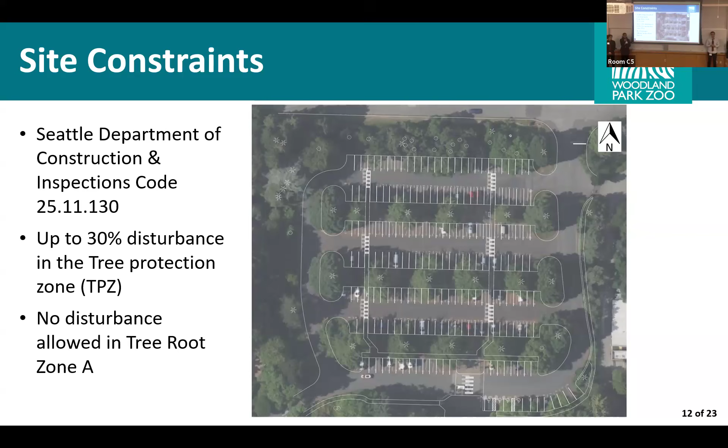For tree root zone A, that is 1/2 of the tree protection zone. Thus, for the 66-inch conifer tree, it has a tree root zone A of 66 feet.

These are all the tree protection zones and tree root zone A's of our site. The most notable site constraint is a tree root zone A. Another site constraint we noted is in the northernmost parking lot. This would not be a feasible location for GSI due to event staging and exhibit interchanging of the site. The permeable pavement would not be feasible.

We wanted to maximize the amount of GSI that we were able to implement, and the trees and the staging area were the main constraints we faced in determining the best size and locations for those. But we determined we were proposing 6 bioretention cells and 1 area of permeable pavement.

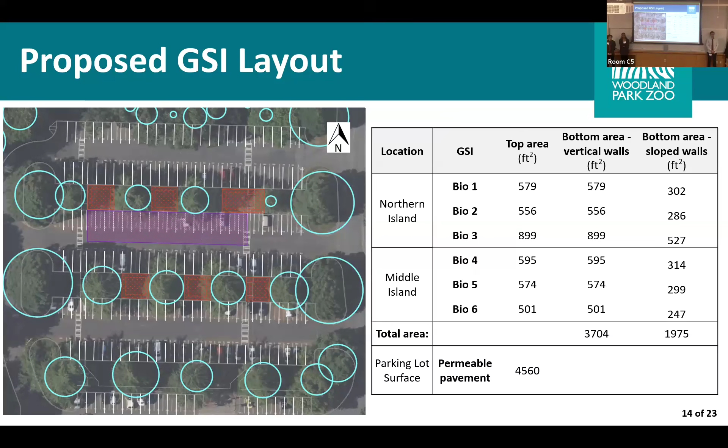Shown in red are the bioretention cells, and if they have vertical walls, this would provide 3,700 square feet of bioretention bottom area. If we slope the walls at 2.5 to 1, shown in the black outlines, this provides about 2,000 square feet of bottom area.

The permeable pavement, shown in purple, is about 4,500 square feet, and combined, these features do not exceed that 30% allowing disturbance within the tree protection zones and do not encroach into the tree root zone A's.

In order to connect the underdrains and overflows previously mentioned to the existing system, we are proposing the new pipe shown in yellow. It's about 566 feet, in which the water will flow from the bioretention cells as well as the permeable pavement to tie into an existing catch basin that is on site. The slopes of these pipes range from 0.5% to 3.2%, which allows for gravity flow.

Considering our site restraints and coming up with our proposed GSI layout, we were able to model a project in WWHM. This figure shows our current conditions for our basin, which is divided into 5 sub-basins at the top, connecting to a downstream connection.

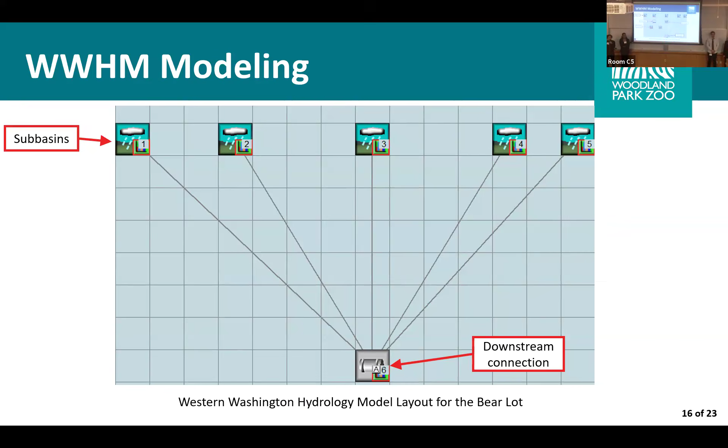From WWHM, we were able to obtain peak flows for a 2-year, 25-year, and 100-year flood, for all 3 alternatives, as well as our pre-developed condition, which assumes completely forested land, and is why it is significantly lower than our alternatives.

Cost estimates for each alternative: alternative 1 will require no cost. For alternatives 2 and 3, this will require different cost estimates. For example, we have the preparation and excavation. For alternative 2, it will be slightly more expensive than 3.

For the temporary erosion and sediment control, all alternatives will require the same amount of money. For the drainage, alternative 2 will be more expensive than 3. We have surfacing also, both having the same cost, followed by landscaping, which in this case alternative 3 will be more expensive.

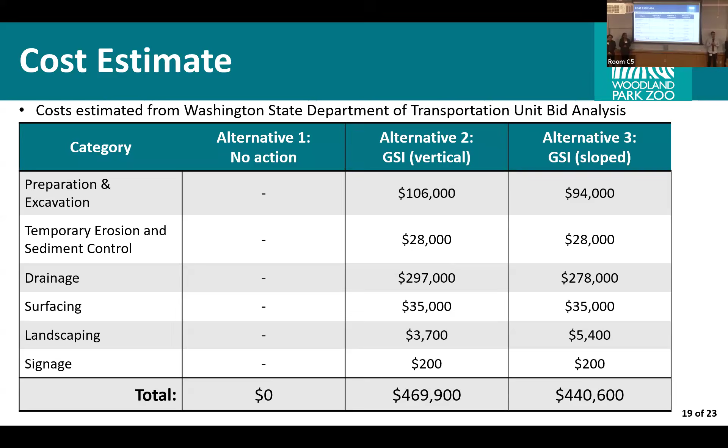And finally, we have the signage, with both alternatives being the same cost, but overall, alternative 2 will be more expensive than 3. In order to determine our chosen alternative, we took a qualitative approach.

The following categories we looked at were flow control, community impacts, utility impacts, long-term impacts, maintenance, constructability, and construction costs.

For alternative 1, which is no action, this serves as a basis for looking at other alternatives, but the most notable categories were flow control and community impacts. This would be because it's leaving the bear lot as is, thus it provides no environmental benefit.

It also provides us with no educational opportunity for the community. For alternative 2 and 3, the results are very similar, with the only different category being safety. This is because for alternative 2, due to the bear lot being a high pedestrian area, the vertical sides of alternative 2 would pose potential hazard.

Thus, our chosen alternative was alternative 3, sloped bioretention with permeable pavement, and next we'll talk about the additional ADA requirements. In order to follow ADA requirements, there is currently 195 parking spots, with 4 being accessible.

For ADA compliance, it needs to be at least accessible to 6 accessible spots. And then for changes to those compliances, we need to add 2 accessible spots, followed by 1 in the access street, and raising the signage.

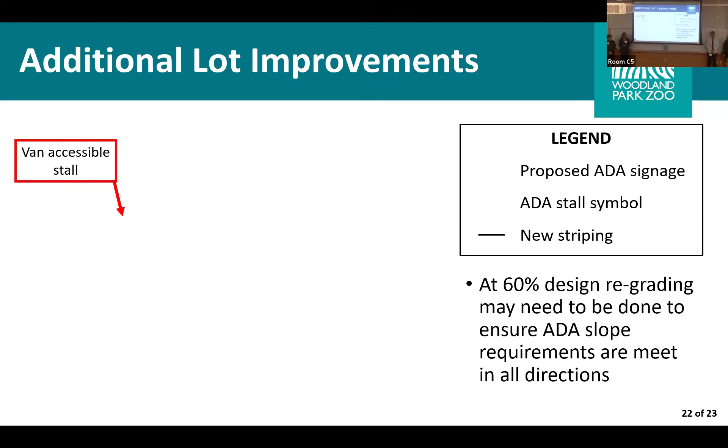Thus, our final recommendations for part 2 is permeable pavement and handled slope bioretention and the additional ADA requirements. Thank you.

We have a slide that asks for questions, but it's also not loading, so if you have any questions, you can ask them.

I noticed the long-term maintenance was shown as moderate for this option. Is that related to the permeable pavement? I mean, that tends to break down with de-icer and also clog. Is that something else considered?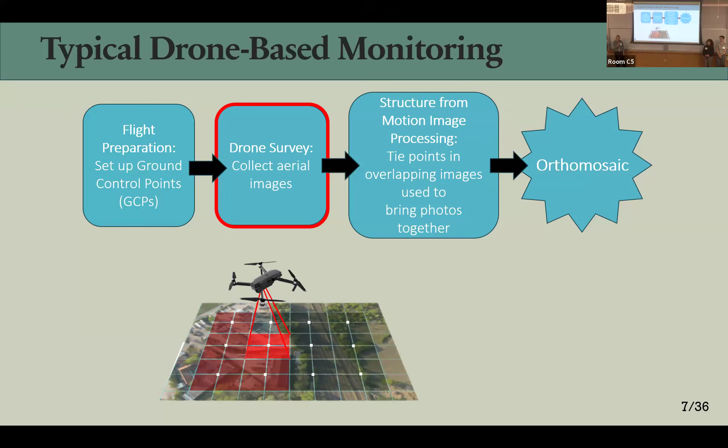These images are then imported and processed using a structure from motion technique. This uses highly visible common points within overlapping images in order to stitch them together. This resulting model is further processed and produced into a highly accurate large map called an orthomosaic.

Surface glare off of the water also results in visual artifacts, and wind poses additional challenges. As you can imagine, it's pretty hard to accurately capture a surface when that surface is actively moving.

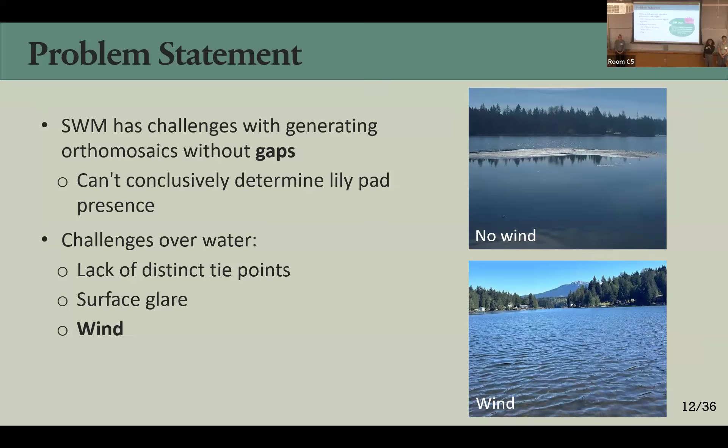Our task is then to determine the optimal parameters, identify the most influential conditions, and develop high-quality, seamless orthomosaics for SWM, to accurately capture surface water features.

We used the DJI Mavic 3 multispectral drone for all of our analysis. It is equipped with an RTK module, which is essentially like a really high accuracy GPS on the drone.

We also used a 2-phase experimental design in which preliminary test flights were conducted at Union Bay, Seattle, which has similar depth and vegetation features as Lake Roesiger, but is a little bit closer to home for us. The results of these preliminary flights then informed more fine-tuned testing and analysis at Lake Roesiger.

We used a pairwise design for all of our flights, as there are many different environmental conditions that are changing all of the time, so it is difficult to directly compare two flights. So we only compared flights where one variable was altered.

So what were those variables that we were changing at Union Bay? First, we tested flying with 2 different altitudes, 200 feet and 400 feet.

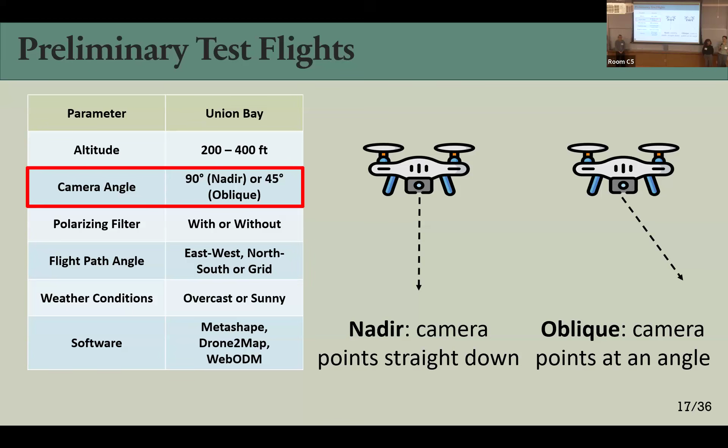We also tested two different camera angles: a nadir one, where the camera is pointing directly down at the ground, or oblique, where it's pointing at a 45-degree angle. We tried the use of a polarizing filter, a small filter applied directly to the drone's camera. The purpose of this was to mitigate sun glint off of the surface of the water, essentially acting like sunglasses for the drone.

We tried 3 different flight paths: north and south, east and west, and then a grid combination of the two of them.

In addition to all of the different drone parameters we changed, we also flew under different environmental conditions, sunny and overcast. And lastly, we processed our images in 3 different softwares: Metashape, Drone2Map, and WebODM.

So once we finished all of our preliminary flights at Union Bay, we were able to narrow down what we wanted to test at Lake Roesiger. From our tests at Union Bay, we confirmed that we wanted to fly at 400 feet, as they were the most successful in the final orthomosaics.

But we did change how we tested the flight path angle. The sun changes position throughout the day, but it's not doing so in perfect cardinal directions. So to accommodate and consider this, we flew either perpendicular or parallel to the sun's path.

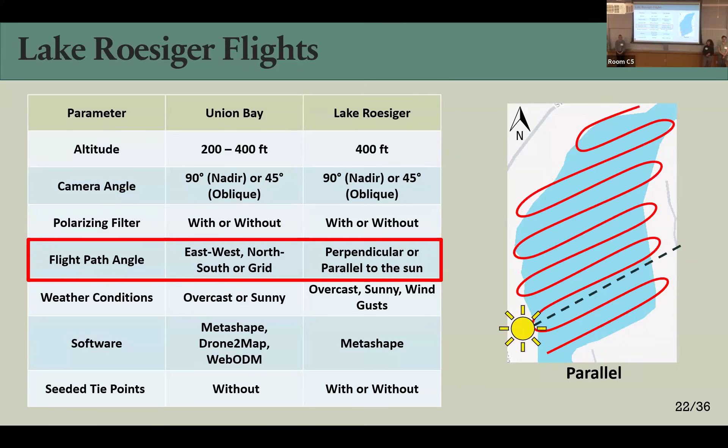Another thing that we were able to settle on was the software. We selected Metashape because it had the highest percentage of image alignment compared to the other two softwares.

And then lastly, we added a new parameter where we put these little buoys — about 3 of them — out on the lake's surface. This was to add additional visual features so we could hopefully have better image stitching and reduce those gaps.

So now we have all these orthomosaics. How do we know that they're any good? Well, we came up with 5 different accuracy metrics to measure the quality of these orthomosaics.

Our first one was areal extent. We constructed, out of wooden planks and weighted rope, artificial lily pads, and deployed them out in the middle of the lake. Once we stitched together our orthomosaics of the raw images, we were able to identify those lily pads in the orthomosaic.

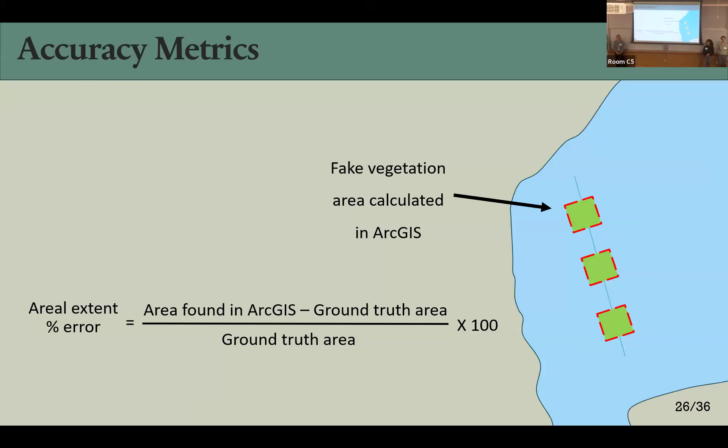Using ArcGIS Pro, we went ahead and traced the outlines of these lily pads. And because we also have a known area of these wooden planks, we then compared the two, and came up with a percent error and a relative standard deviation.

Next is point cloud outliers. This is a representation of the visual noise within the orthomosaic. A point cloud is a 3D representation of individual points, each with their own spatial coordinates. We then applied a cross-section across the water surface of the lake and the point cloud, and all points greater than 0.5 meter above the water surface were labeled as outliers. These outliers were then compared to the total number of points within the orthomosaic, and we received the percent outliers.

Next, and finally, we did the lily pad percent error. This was done first by conducting a 50-foot aerial survey of our sample area. This acted as our ground truth, as it was a highly accurate depiction of the lily pad locations.

We then did a binary presence assessment. This was done by applying a grid on our sample area, and within each cell of the grid, we assessed if yes, there was a lily pad present or no lily pad present. We then took the results from the 50-foot survey presence and the results from our orthomosaic lily pad presence and compared them in order to get the percent error.

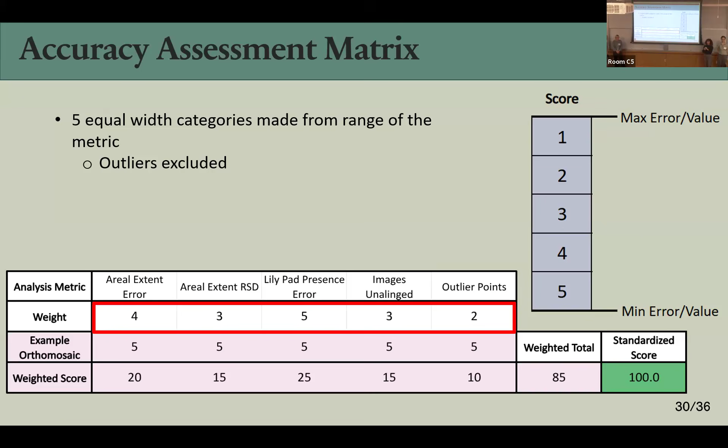We then looked at the total range for all the values for each metric and divided it into 5 equal bins, excluding outliers, and scored all of our orthomosaics. We then assigned a weight to each of our metrics based on the priorities expressed by our sponsors and calculated a weighted score. These weighted scores were then standardized by dividing by the total number of possible points.

So our final drone parameter recommendations: flying at a 400-foot altitude with a nadir camera angle, a flight path that is perpendicular to the path of the sun, and utilizing buoys as seeded tie points. The results of our polarizing filter testing were inconclusive due to conflicting results in replicate trials.

Our optimal environmental conditions were sunny weather and low wind. Our wind results are very consistent with literature already existing. However, our weather conditions really weren't.

We believe this to be due to the shallow nature of both of our basins. In sunny weather and in shallow water, there is enough light to see all the way to the bottom of the basin. And that means that there are plenty of stationary and distinct tie points.

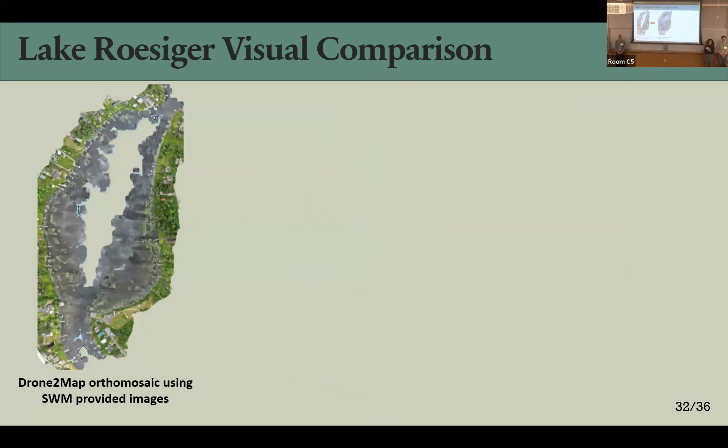Now let's put this into perspective just a little bit. First, we have this orthomosaic that we started out with using Snohomish County's images. There's gaps and pixelation. This is processed in the software that they currently use, Drone2Map.

Now we have those same images, but processed into Metashape. It got rid of all of the gaps, but it also introduced large visual artifacts. And now, here we have, using our methods, an orthomosaic processed in Metashape, showing highly accurate and increased clarity and quality.

So our results are looking pretty good, but we wanted to do one last validation. This involved taking 5 transects in the field and hand counting all of the lily pads within a specified distance of the transects. Then we flew flights at 50 feet, 100 feet, 200 feet, and 400 feet to see if we could count the same number of lily pads in those orthomosaics as our ground truth survey.

Then we standardized our results to be on a per square meter basis, and we got these results. As you can see here, all 4 altitudes had roughly the same error, being about less than 1 lily pad per square meter. This indicates to us that flying at 400 feet is suitable for our task of capturing water surface features.

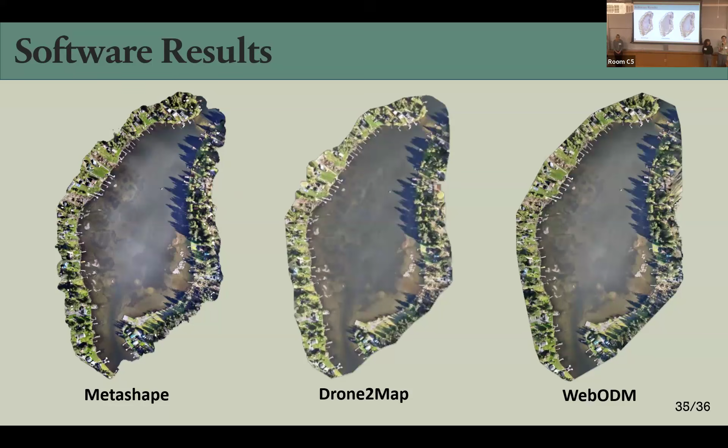But what if you don't have Metashape to do this analysis, which is the case of our sponsors? You can also use our methods to process images in Drone2Map and WebODM and get high quality seamless orthomosaics, proving that our results are applicable across multiple softwares.

And with that, are there any questions?

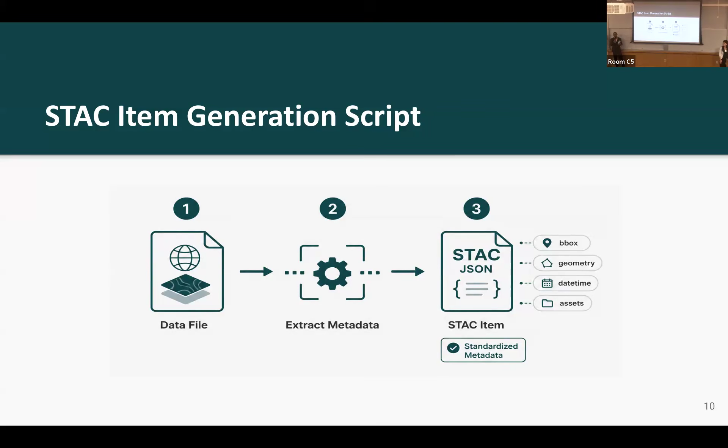A STAC item can have, for example, a name, a boundary box, geometry, an asset link, or maybe a date. This is really important for us because it helps us connect our STAC workflow to the rest of the system.

And now for our first of the two demos. The first demo is the STAC API demo, which is used to help load datasets onto QGIS.

First, you'll need to be connected to the Google Cloud SQL proxy and Docker like I'm doing here. Once that is established, you can create a new STAC connection. The connection name can be whatever you want, and the link will need to be the local 8080 to align with the Docker connection. Once you do that and the connection is created, it will show up on the STAC folder on the left, as you can see here.

Then you can open up the connections and then open up your new connection. It will show the datasets that are present that Resilient Forestry uses. To find out more information, you can right-click a file and find out details. In there, you'll find important metadata, including boundary box, geometry, date time, etc.

But the most important part is when you scroll down to assets, there is a URL with a portion called the Virtual System Interface for Google Cloud Storage, or VSI for short. You can copy that link and use it to directly load vector or raster datasets onto QGIS.

For example, for this part of the demo, I'm loading in a raster dataset of Washington State named CanCov 2025, and it works just as you would doing it locally, except using that link. Once the dataset is loaded, you can see that it's now loaded as a new layer on QGIS. I proceed to do the same thing for a vector file, which is an outline of Washington State.

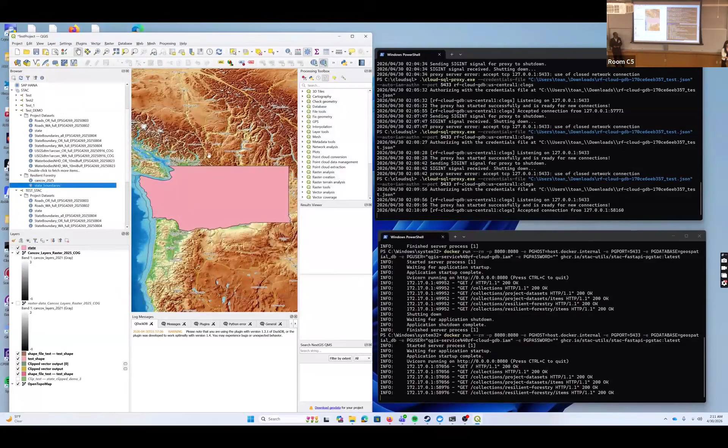Same process as before, you just need to find the VSI link, copy it, and then add a vector layer, and paste the link and it will show up on QGIS. This is very important for Resilient Forestry because it allows them to use a single API to find important metadata and also to directly load these datasets.

But what about if the datasets are really large, or you just want to see a portion of it? Well, that's where our next demo comes in. Next slide.

Our next demo is a clipping demo, which is another important task of the project. This is because datasets can be very large, and loading entire datasets can be very cumbersome time-wise and resource-wise. Here I'm showing you the first part, which is the vector.

First, you need to paste in the VSI link you found in the previous part of the workflow, which is the STAC API. In this case, it is a GeoPackage of Washington State. And then you have a local area of interest on QGIS that you use as a digital cookie cutter, used to clip out the portion you want to keep, and everything else is disregarded.

Then you can save it to a local file on your PC. Here I'm naming it clip state for GeoPackage. This is for demo purposes, you can name it whatever you want. Once you click run and the process runs, in just a few seconds it will output a new layer, which is the clipped portion of Washington State that overlaps with the area of interest only.

The same process applies for raster datasets, and the process is almost exactly the same, but with one key change. With raster datasets, whenever something happens to them or you change how they're viewed, they are resampled. So there's also an additional resampling method, and I'm choosing nearest neighbor for this one.

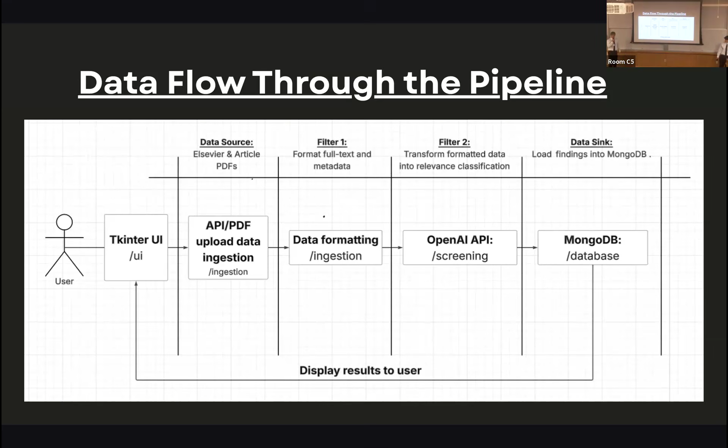This looks daunting, this looks scary. You don't need to pay attention to all of it, I'm just going to go over a few quick points. This is more for people who are interested in what type of libraries we use, stuff like that.

I talked about how we ingest articles through the API, but we also have a PDF upload function. This is actually how we tested our product, because we had an existing database that was provided by our sponsor. We have articles we know were rejected, and we have articles we know were accepted.

So we can test basically to see how well the AI model actually works, and that's why it is also helpful. We only have access to 3 journals, so maybe if a fellow researcher from another company sent them a cool paper and they wanted to upload it, they can.

After that, we feed it to our grader, like I said, and it goes into the MongoDB database. I'll touch on this too, CSV export. I'm sure you guys have used Excel, you know what Excel is, right?

Well, they have an existing database of almost 20 years, and it's a big database, but it's in Excel's format. So they wanted to be able to add on to their existing database what our tool would actually give them, and that was an important feature.

Now that we know a little bit about our data processing pipeline, as well as the components that make it up, I want to talk a bit about the steps we took as developers to turn this solution into code. For collaboration, we utilized GitHub following a branching strategy. We went with branching just to keep a consistent main branch so we could provide regular demos to our sponsor.